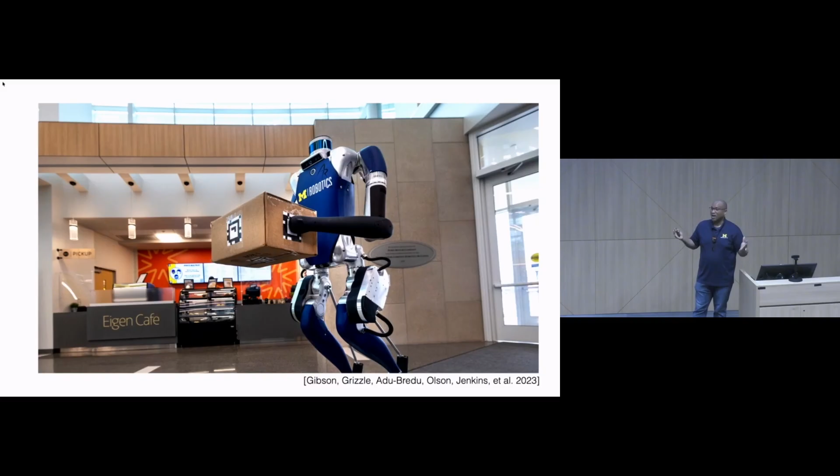Just to give a sense of one of the robots we've worked with, this is the Agility Robotics Digit. This is a robot that my colleague Jesse Grizzle had in the lab, and I've had the good fortune to work with him. One of my students and some of his students worked together on getting this robot to do various tasks at the building scale - being able to pick up objects and take them to places beyond just the lab, working in common human environments. This really poses new, interesting, and challenging problems for us.

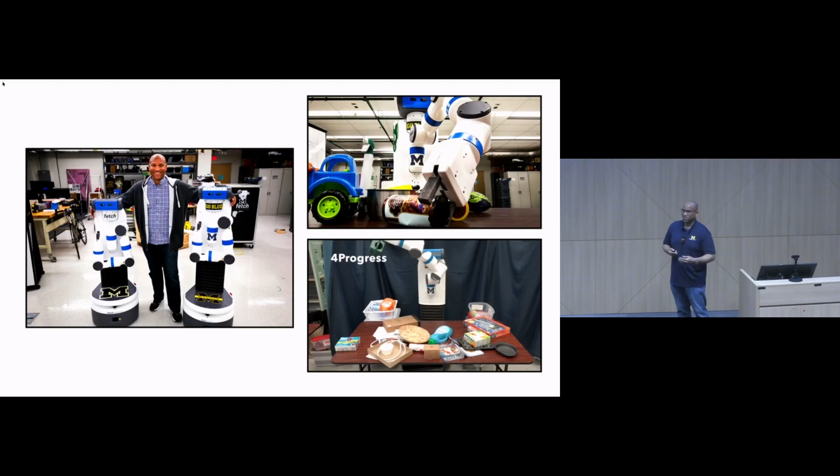I've had the good fortune of also working with a number of mobile manipulation platforms. Our still go-to is the Fetch robot right here, capable of mobility and manipulation. We've had this robot since 2015 when I started at Michigan, so somehow we've been able to keep this robot alive and working over 10 years. The ability to have dexterity in complex cluttered scenes like our human environments is one of the major challenges we're starting to address in robotics.

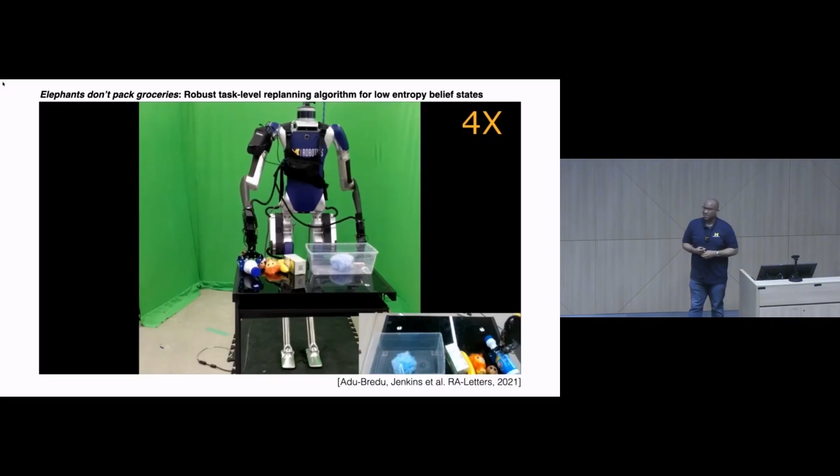So to give a sense of what this looks like for humanoids, this is work that Alphonsus Adu-Bredu, who's now at Boston Dynamics, did with humanoids. This was just a bin packing task—the robot picking up different objects, sort of like a grocery store helper that could pick things up and stack them in a little knapsack. This would start to add manipulation and dexterity to our robotic platform.

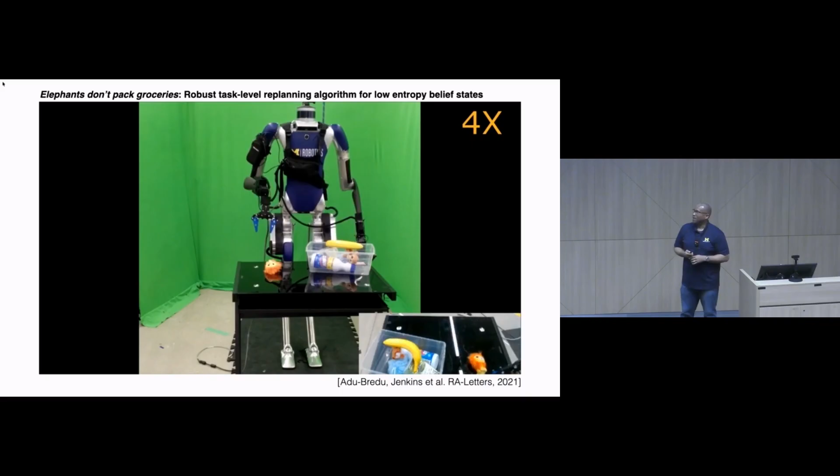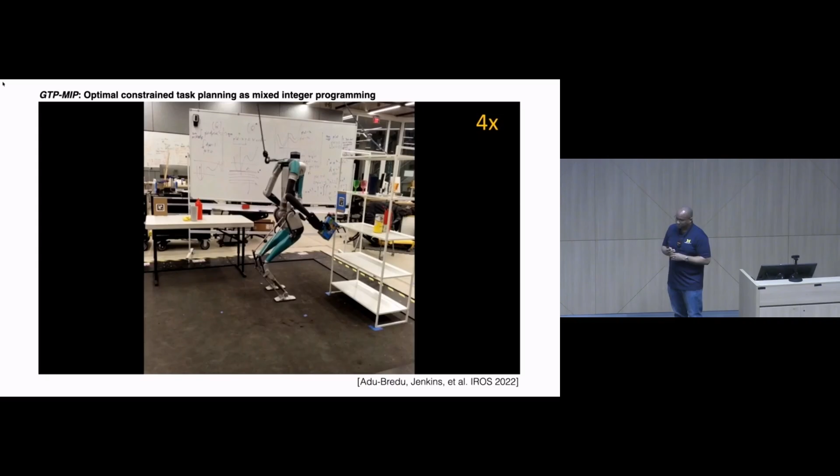And this is what we did—it says 2021, but really 2020, this is the beginnings of putting manipulation with robotics. We tried to extend that to a shelf stocking task. You can see there are AR tags there. This was really about how we could use it, and at the time Alphonsus was interested in mixed integer optimization, which gives you a sense of where we were at the time.

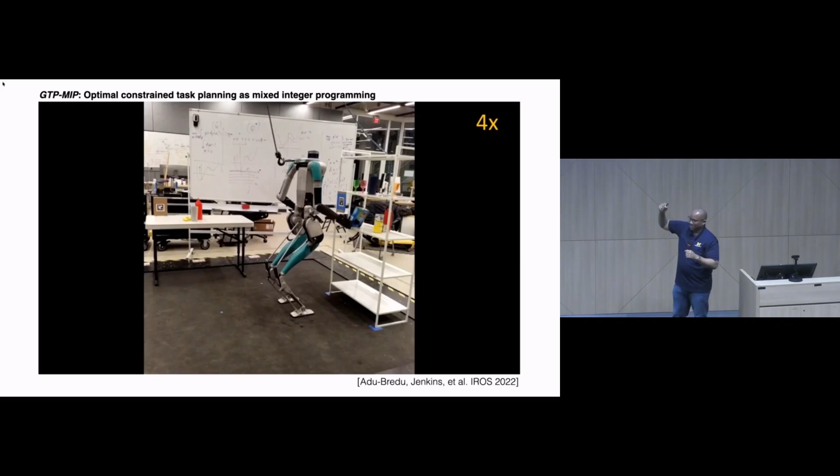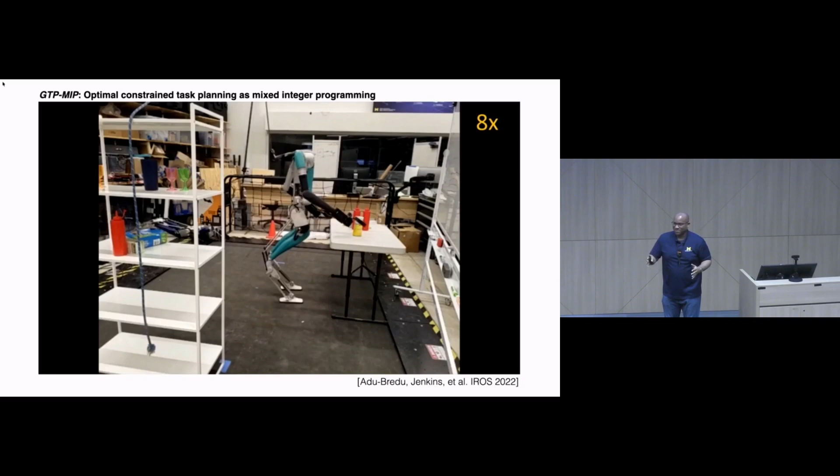We didn't really have perception fully integrated, so we had AR tags and QR tags everywhere. The robot kind of doesn't have full perception of the shelf, so it makes a few mistakes here or there. It can work—we can combine mobility and manipulation. We should also note the robot has to move, then it stops, then it manipulates, does the manipulation action, then moves again. So it's not necessarily fluid, but that gives you a sense of where we are in humanoid robots.

We're starting to get past that state, but it still is true. We could also do material handling tasks.

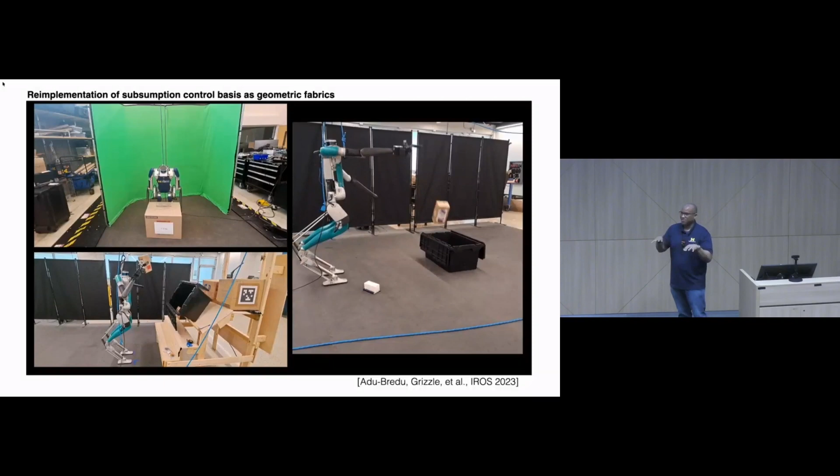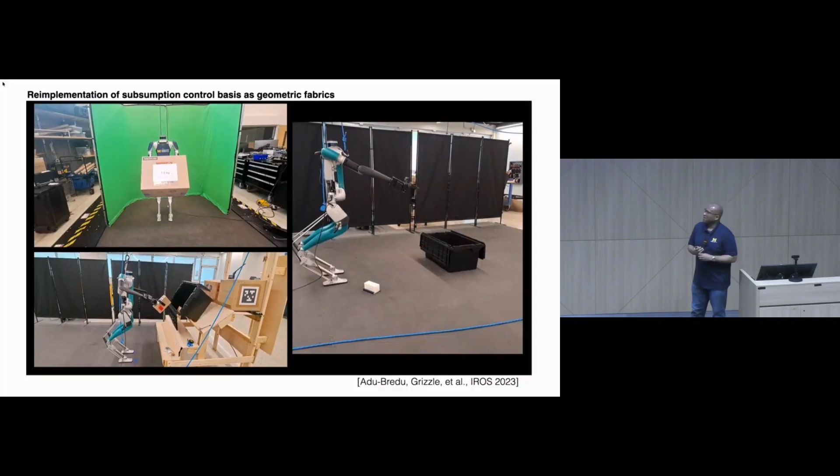This was something that Alphonsus worked on with Jesse Grizzle, which was to be able to use geometric fabrics, which is sort of like a robust control basis, to do various tasks in a reactive kind of way. This is sort of like null space compositions of controllers, which is an interesting idea. I'm still not convinced because I like some form of guarantee, some sort of robustness, but I think these are interesting ideas. It shows where we were at that time.

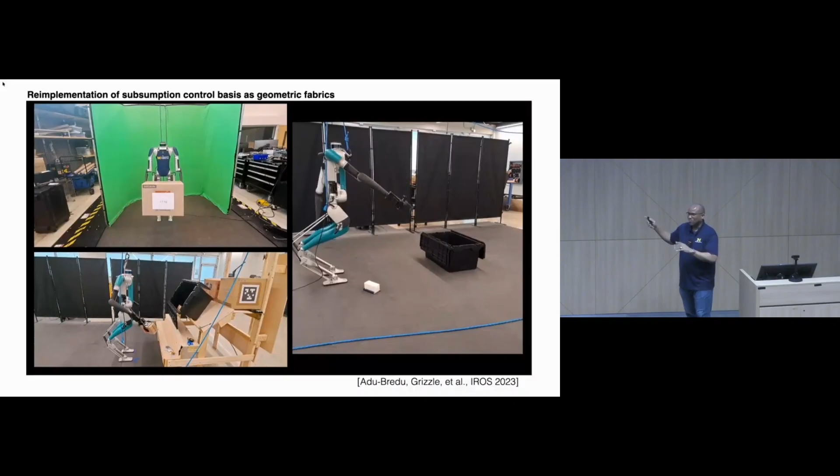What I would argue, though, is in order to take the next step, to get beyond where we are right now, we have to think about a degree program that can produce lots of people that can think about the emerging needs for robotics as a discipline of itself, not just an interdisciplinary research area, that thinks about both equity and excellence, so we can have a positive impact as we make our intellectual advances and meet these emerging needs in society.

There's interest in robotics and what we're doing, and we need that help. If you want to know more about what we did to launch the robotics program, we published on arXiv, so all the details of what we had to do in designing the program and what we had to do to get approvals, you can see that on arXiv.

As we did this, it really led to sort of 3 big questions that I got as I was leading our robotics major. Does anybody want to know what the top question I get from students for major? Because it's 9am I'm not going to ask you to say, but the top question is, what job can I get with a robotics major? Like why should I not do computer science or electrical engineering or something that people understand and employers want? Why should I take a chance on robotics, which people don't really know about?

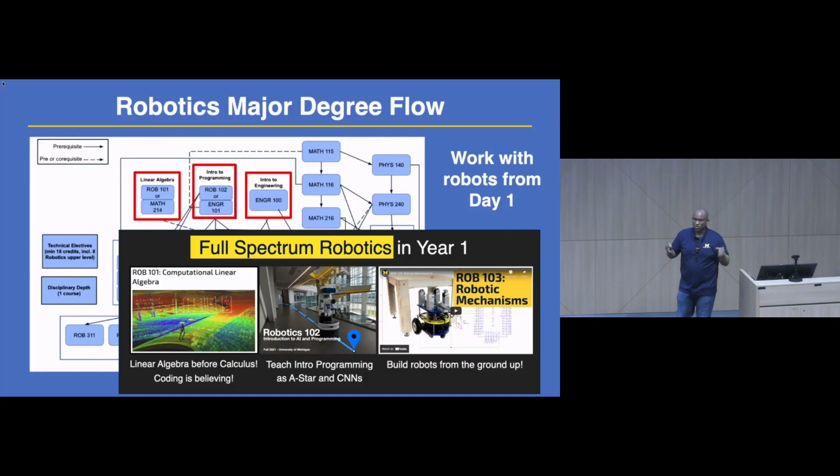What that really means is that we start with linear algebra alongside or maybe even before calculus and use it for sensing and control tasks. We teach programming through teaching autonomous navigation, so A star with a little bit of a convolutional neural network, and we have a robot building class. So students work with robots from day one.

Then we get to year 2. We put human-robot interaction and professionalism and professional ethics up front. So this is the class that we take in their second year, an intro to human-robot systems class. So working with people to develop robots for people is really important. We don't want to push that off to the end.

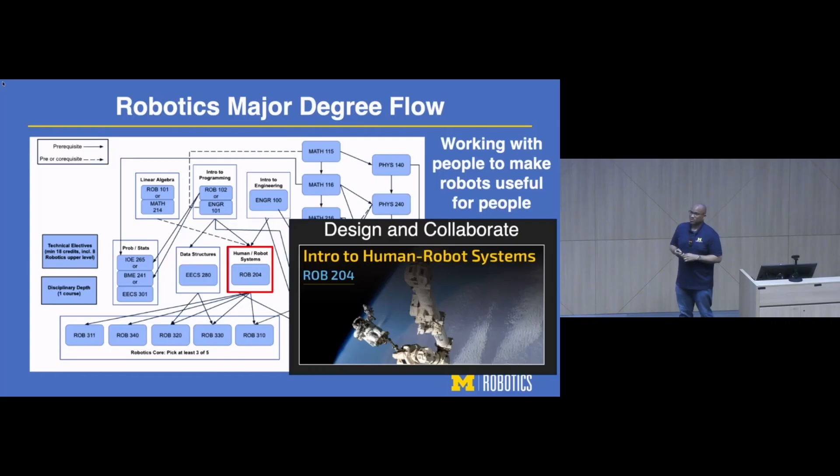Every major needs computing. They need to take first semester data structures, probability, electronics, mechanics. We can't avoid that - those are things that every engineer, every scientist working in this area needs. And then this gets to the core.

In our core, we try to have a set of classes where they have to really deal with sensing, reasoning, and acting and interaction on the whole. And so we have a number of these classes. I teach the Robot Operating Systems class, which is not just a ROS class - it's about inter-process communication and how you develop software systems for robots. So these are our core 300 level classes.

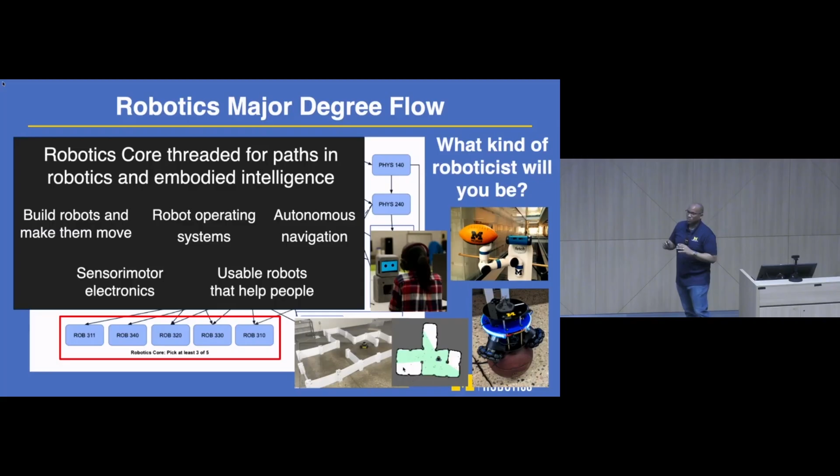But to understand where this comes from, we took the idea of Brooksian embodied intelligence. So Rod Brooks came up with the idea of a sense, model, plan, act framework. This is from his seminal paper, Intelligence Without Reason, from 1991.

And you're really thinking about the closed loop for how robots actually work and how we describe them. This is sort of Brooksian embodied intelligence. If we took that idea and put it into an actual framework, it looks like this: we have a closed loop between decision making and your actual system, with perception in between, and people interacting with both the system and the decision making.

This is just one way of thinking about it. If we take that loop and think about everything happening inside of it, our system is there. We sense the world. From our sensing, we develop partial observations. We develop a model of the world from those partial observations, and use that to make decisions. Decisions then go into controls to generate the forces that go into your system, and then we do it all over again. This is really how almost all of our robot systems work.

If we take those and put the math that goes along with that, and also say certain of these deal with interaction, with autonomous robotics, and embodiment or mechatronics, this really starts to give us a scaffold of what students need to be a roboticist, what our discipline looks like from a programmatic perspective. If we assign class numbers to each of these, they become our 300 level courses, and from those we have prerequisites.

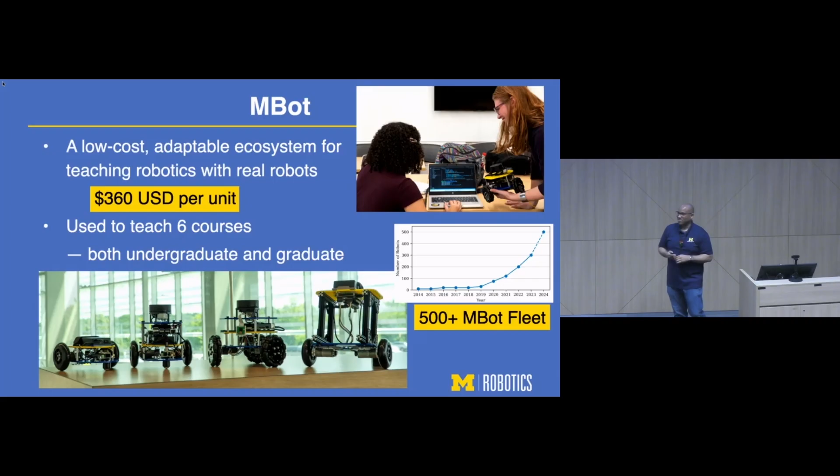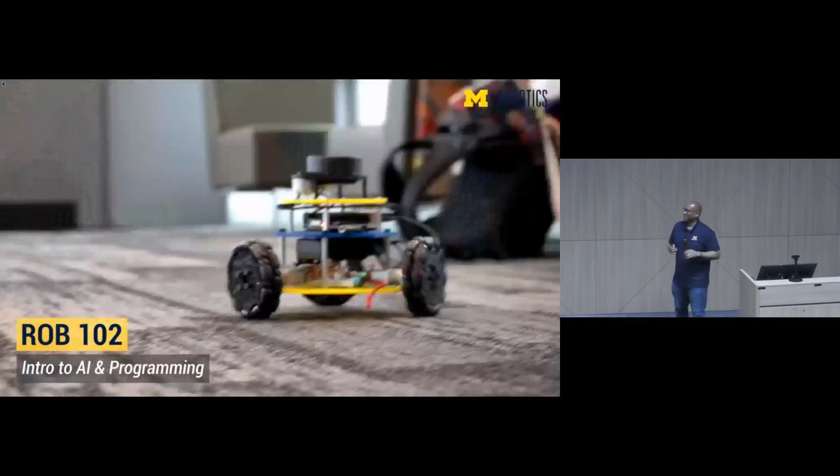This is the OmniDrive version of the robot that I use in my class. It has laser range finding on it and can move around - giving a lot of thanks to Peter, who's there. Peter doesn't know how much he and Manuela influenced me when thinking about the OmniDrive design. We have a really low-cost platform that does full SLAM, so our students, as sophomores and juniors, do full occupancy grid SLAM as a bridge into larger explorations into perception.

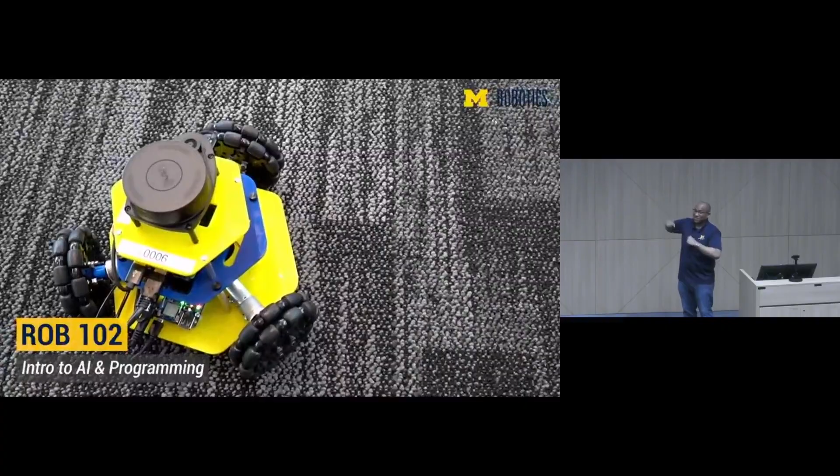This is actually a first semester class, where we teach programming through the lens of AI through autonomous navigation. So we have to build and maintain about 500 of those robots - just a small aside there.

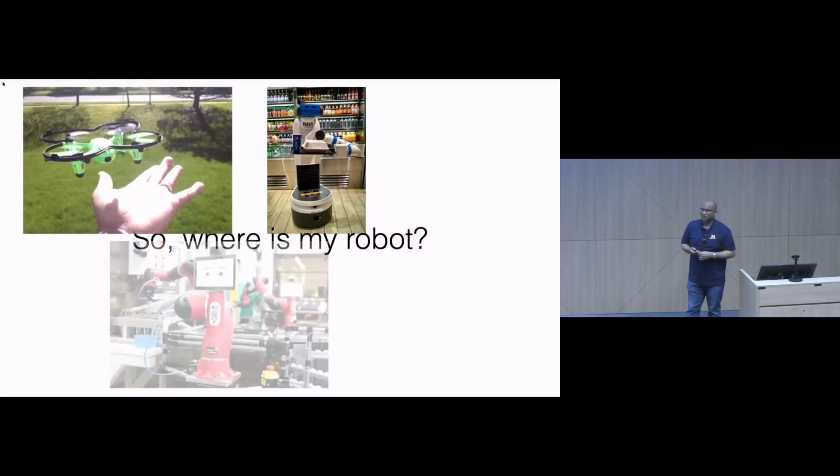So that's really our program. But then we get to the next question that students ask me, which is: so where's my robot? A lot of students ask, where can I go to work with these robots? And I would tell you that your robot is already here. We have different types of robots doing all different types of things, and you can buy these robots right now. But the real question is not necessarily how many robots you have, but what are they doing?

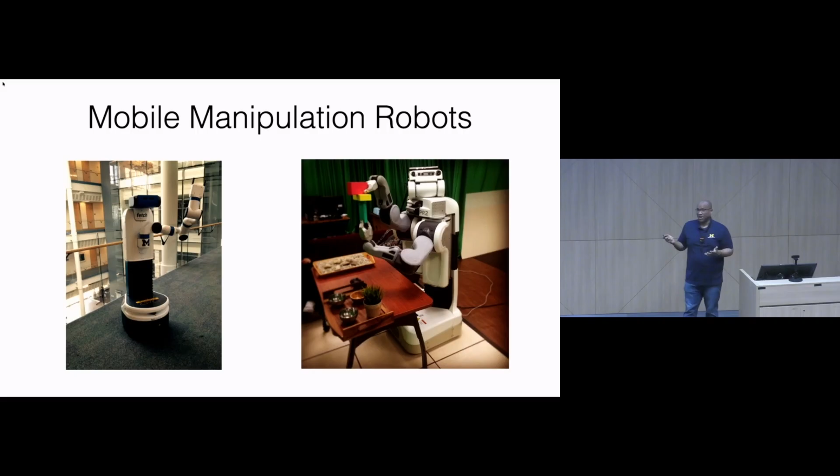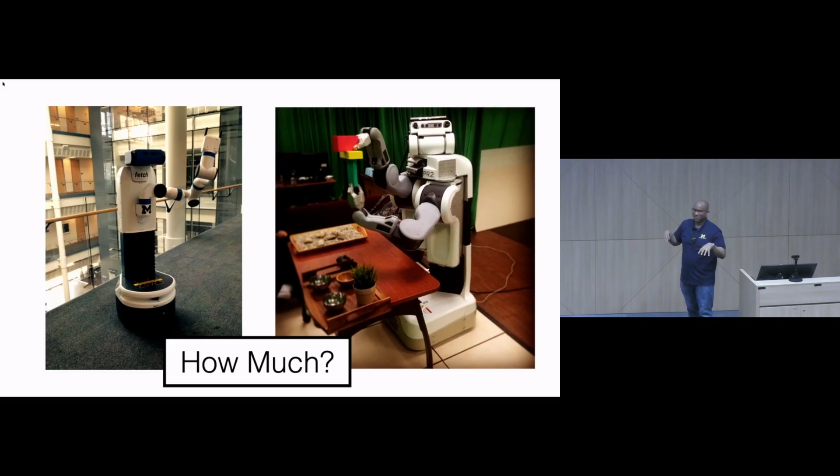Mobile manipulation, being able to work, move, and have dexterity at the human scale is really important. You can buy these robots right now. So usually I ask - because I'm running short on time, I won't ask how much these robots cost, unless somebody wants to guess. That's the Willow Garage PR2 that I had when I was at Brown, the Fetch mobile manipulator when I made my first purchase here. Anybody know how much these cost? Anybody want to guess?

What's that? USD, yeah. What? 500K, I like that, there we go. 500 - what was your guess again?

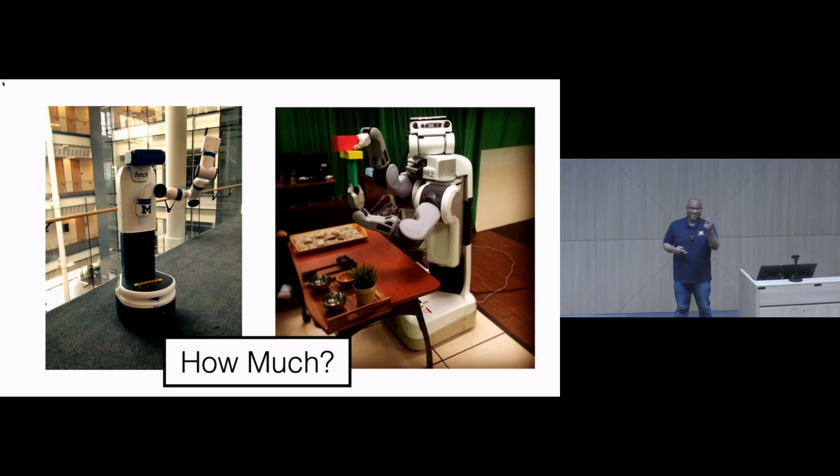20K, all right. I like that. I like all of those answers. The reality is all of those are right, because it just depends on what time you're thinking about.

So I bought my Willow Garage PR2 for $400,000 in 2009. First purchase when I got to Michigan was the Fetch robot, about $100,000. If you've seen my talk before, you'd know that the first humanoid robot I worked with was the NASA Robonaut, and if you did a least squares regression from linear algebra, you'd get $20,000 - that was my prediction back in 2015 of where robots were going.

And that roughly is true. On one end, you've got Hello Robot, the Stretch, which is about $20,000, a little less than that. Then you have humanoid robots, and all sorts of other systems on the high end - you're going to see all sorts of heterogeneous robots. But this is just the hardware. We've gone from building small numbers of bespoke robots all the way out to massive numbers where economies of scale lower the cost.

But when we start to think about the software of these robots, the autonomy - when I was a graduate student, it was all teleoperation, remote control. That was how most of these robots worked, with head-mounted display and VR and those types of things.

Over the last 20, 25 years, we've been able to do things like put that there. We have enough autonomy where we can have a robot go from location A to location B, like an autonomous vehicle or a mobile manipulator.

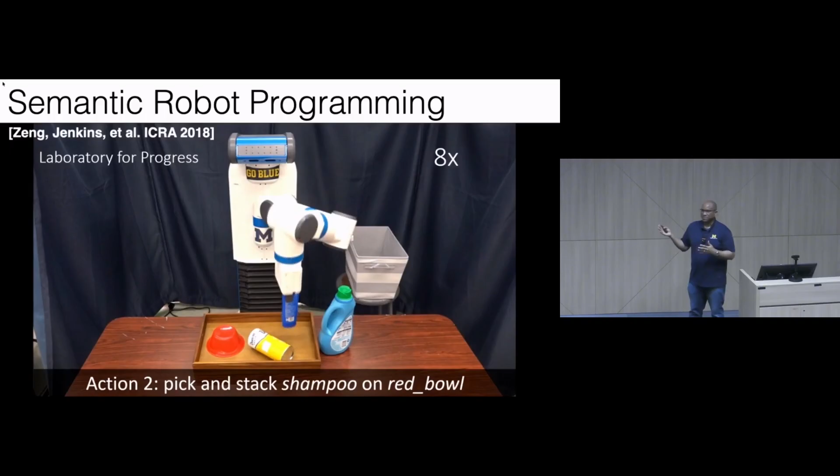And then be able to - that's how the robot would work. You could just give it that without giving a language prompt - that's how you express a high-level task. So what's important in this, like I said about 10 years ago, is that you're not telling the robot to do this action or this particular motion in its configuration space.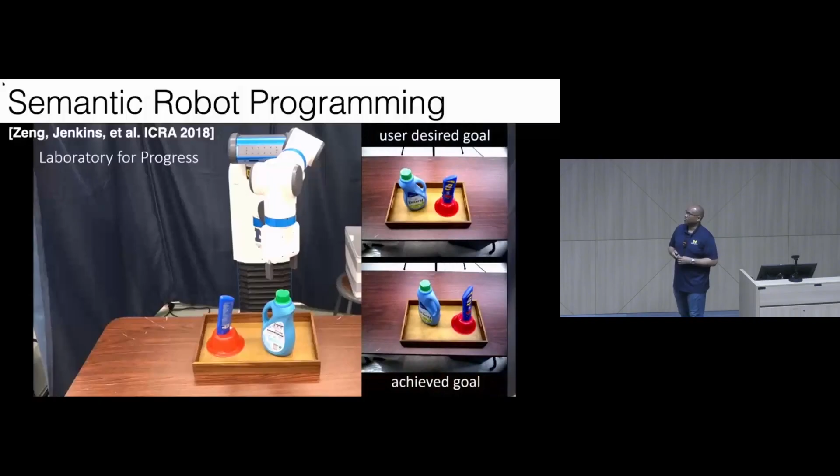So we did semantic robot programming with a number of robots, and our robot is able to work in a number of different scenes with some constraints, but we're able to have that goal-driven robot.

One thing I sort of hid with this is the challenges we have with perception, and so scene estimation and clutter can be a really big issue. And so for all sorts of reasons, such as occlusion, stacking, off-balance constraints, everything that my kids do to mess up our house, this is what we have here.

In general, what we want to do for perception is not rely on green screens or monocolored objects or isolated objects. Usually when we're showing videos of some great manipulation task, we've isolated the world into particular objects, and the clutter that exists in our usual world is not there, or we use AR tags. We'd like to try to ease those crutches.

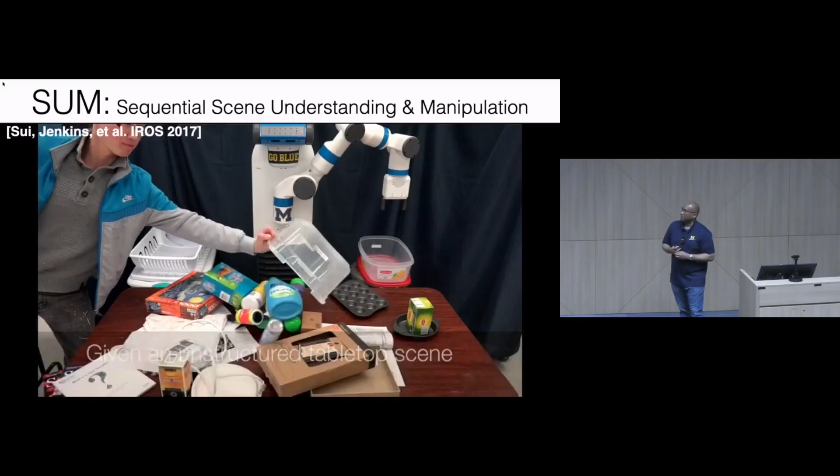Another thing that my group and I worked on was what we call sequential scene understanding and manipulation. This was trying to combine neural networks for recognition with probabilistic inference, so we can get the best of both worlds, the robustness of probabilistic inference and the speed and recall power of neural networks.

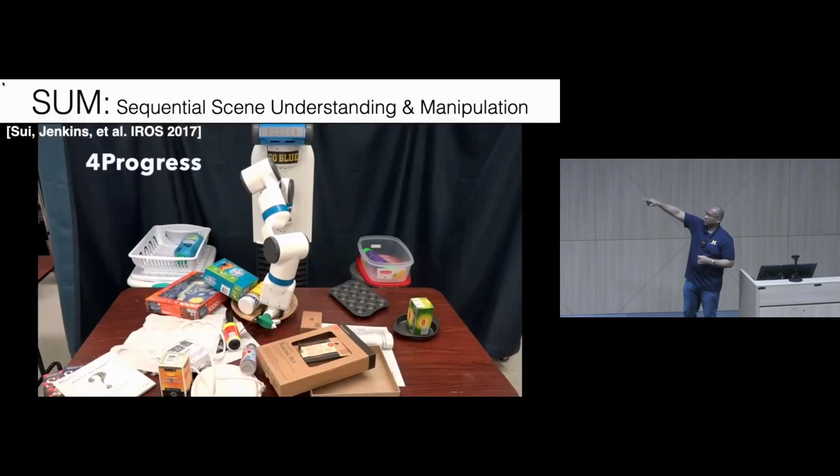In this case, the robot is able to detect objects in clutter and sort them into objects that should go in the laundry room and objects that should go elsewhere in the house.

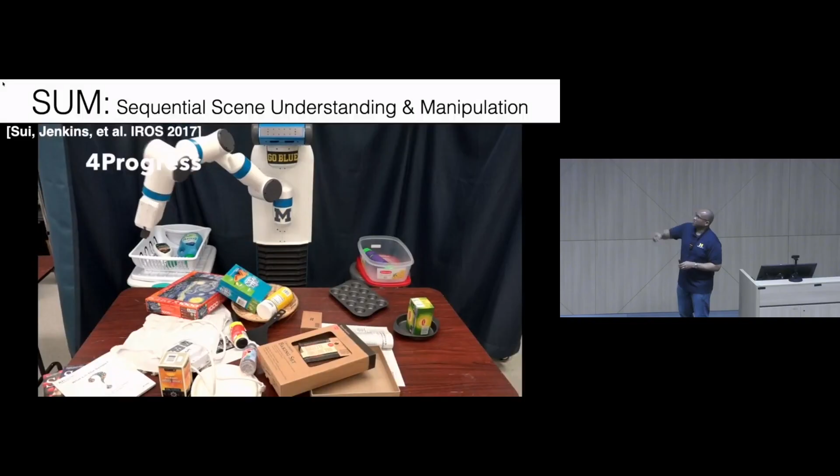If you're American and you saw that the comet went into the bin that should go into the laundry room, that's not right, it should go into the kitchen. But that's not because the robot made a mistake, it's because my students don't do laundry or dishes, and so they made that mistake.

Anyway, the way this worked at the time was that we would use a neural network. We use RCNN to essentially generate candidates of potential objects that were in the scene, and then from that we would enumerate the different possibilities of what object could be there.

We would try to refine that into a physical state estimate, a reasonable state estimate, using essentially particle filters on each object. That would give us a reasonable state estimate of the world that we could then use to do grasp planning, using the fabulous Rob Platt handle grasp estimator.

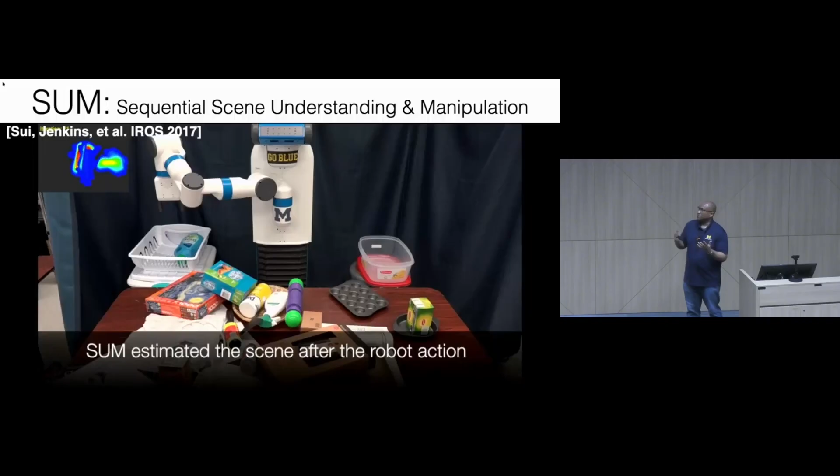This system worked pretty well for doing manipulation in clutter, and we still use this manipulation pipeline in the lab today.

But as we come back and talk about, we want to do more than just grasping. We want to know the affordances on the object. We come back to our lightsaber right here.

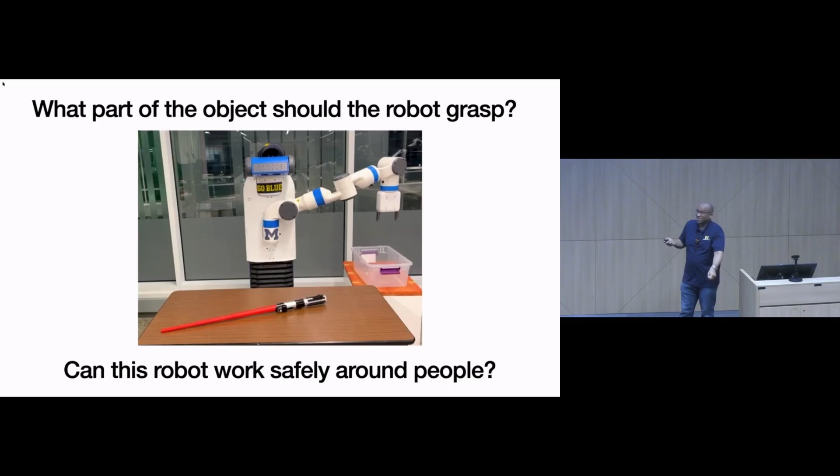So what part does the robot approach, right? That is obvious to us, but where should it grasp? For us, it's pretty easy to know it should grasp the handle. The robot should just be able to know that it shouldn't just grasp on the red part, it should grasp on the handle, because that is a lightsaber.

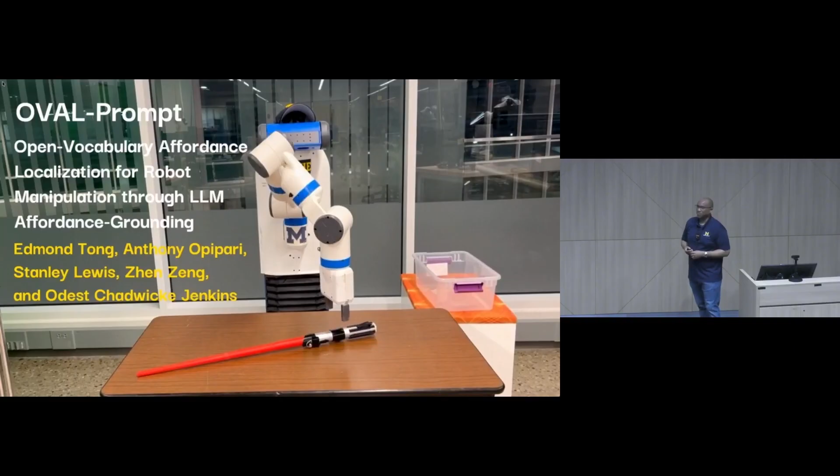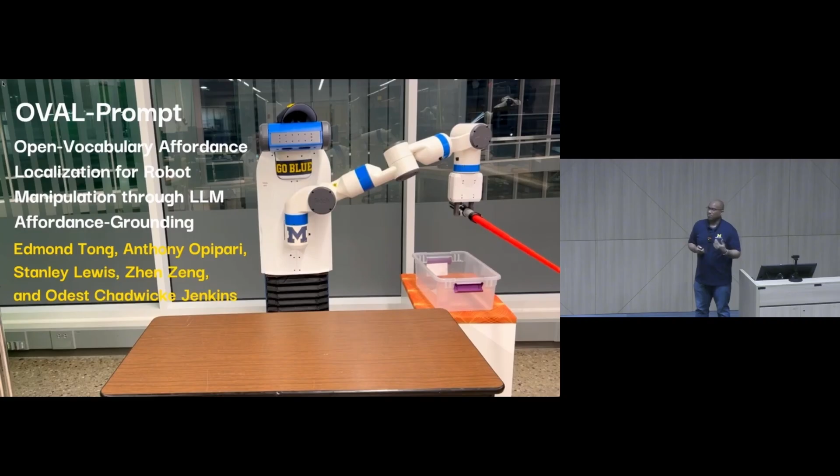But estimating the semantics can be challenging. One thing that was led by Anthony Opipari and a number of students, Edmond Tong and Audi Balaji and a number of other contributors, was our oval grasp pipeline. The idea is to think about task-oriented grasping.

For instance, if your robot is going to grasp scissors and give them to you, should the robot grasp the scissors by the handle and then lead with the sharp part to give to you? That'd seem pretty aggressive, because it might feel like it's stabbing you, and that's not great. What you should do, like with a person, is grab by the sharp end of the scissors and hand over the handle to the other person. That really is based on the semantics that we have for these types of objects.

So what we've done is we've created oval grasp, which essentially will take a language prompt as the input, and then be able to use the combination of an LLM and a VLM with point cloud data, trained so that we can actually filter grasps based on the semantics of various objects. The details are in our paper, which appeared at ICRA this year and is also available on arXiv.

Essentially what we did was have different types of objects, and based on the task, based on the language prompt we would give, the robot would have to figure out where to grasp so it could achieve a particular task.

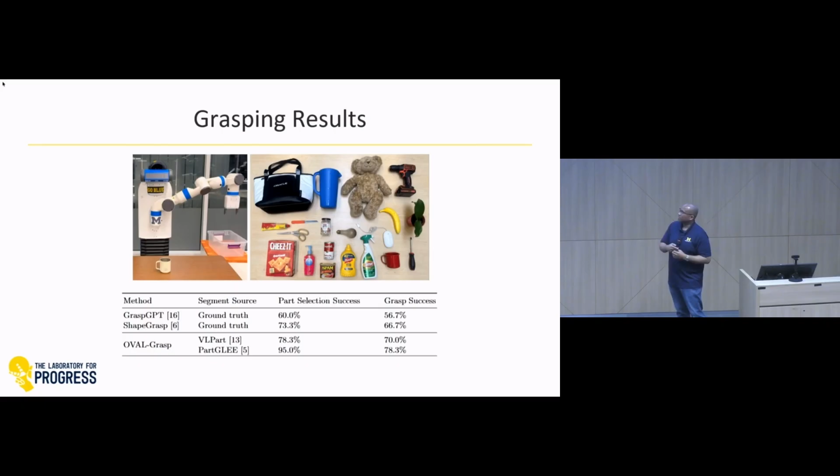When we do comparisons to other approaches like Grasp GPT and ShapeGrasp, we get better results with our combination of LLMs and VLMs. Those are just our numbers right there.

But qualitatively, there's a number of things we could do with this. If you have a box and you said read the barcode, the robot would be able to grasp so that it could actually look at the barcode and it's not occluded. Or if you want it to read a label, it could make sure its grasp isn't occluding that.

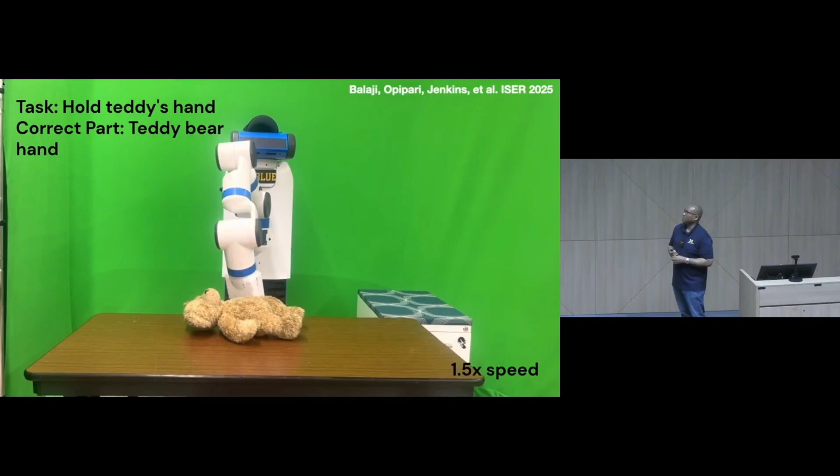So this is just some results that we have right now. If you ask the robot to peel the banana, it knows it has to grab the tip of the banana so it can peel all the way down and hand that over to a person. If you said hold the teddy bear's hand, that's a language command, and the robot could grasp the hand of the teddy bear and move it over. So we have what you'll see in a number of these.

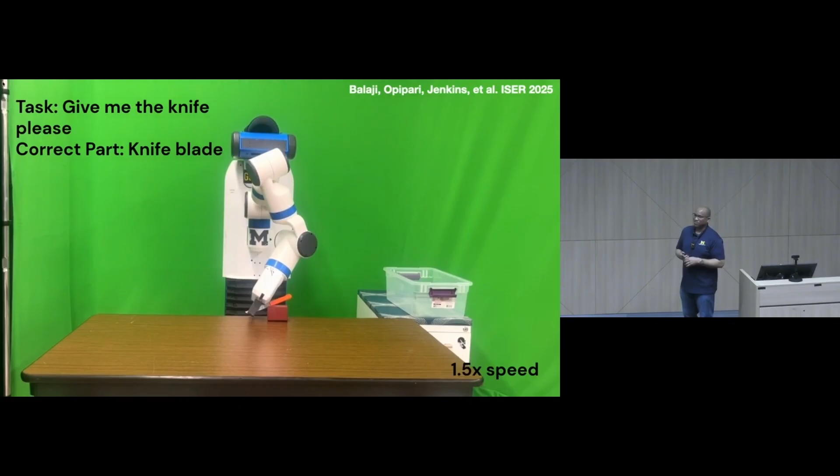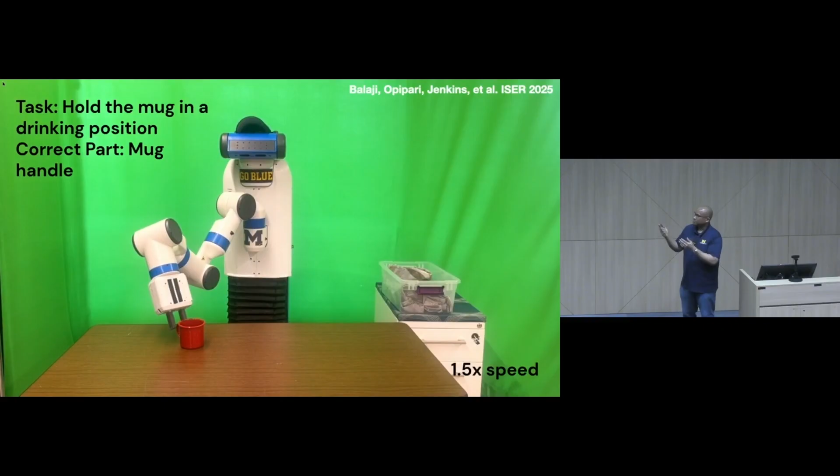This is like the knife - if you're going to give the knife over to somebody, you should handle it by the blade and leave the handle apparent. This is another example with the mug, holding it by the handle. So you can do this directly with language prompts, which is pretty good.

The other technical part I wanted to talk about is segmentation for 3D maps. As I showed before, being able to do dexterity with humanoids at the building scale means we can start to build the geometry of these spaces, but we still need to know the form and function of objects so we can have affordances like the OVAL-Grasp project. We've got to segment out and know that object is a particular object, so segmentation becomes really important for our 3D maps.

One thing we've been working on - Anthony Opipari has been working on this with a number of good colleagues at Amazon - is doing class agnostic video segmentation. If you use segment anything models, segmentation is getting really good, but it's not necessarily perfect.

So what we want to do is think about how we can develop the best segmentation of Gaussian splats, where we can take a sequence of image frames and get consistent, non-jittering segmentations throughout time and space, so we know that thing is that thing and it stays that thing in the mind of the robot for a long time.

So what we had - do I have to click through this? Hopefully I didn't. Oh, I went too far.

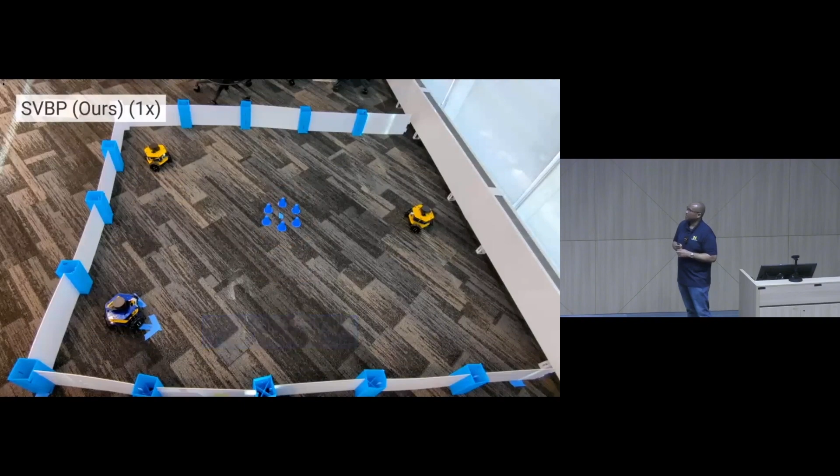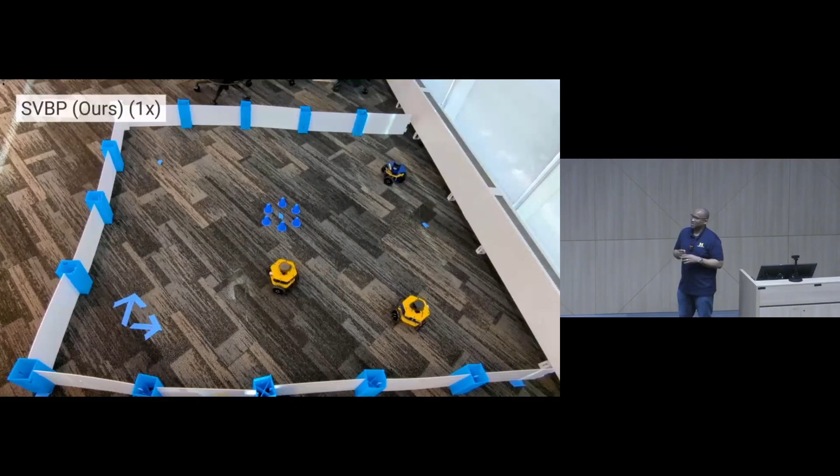And so they can move around very, very fluidly to get to their goals. I love the fact that we can run this on relatively cheap hardware. For the sake of time, I'll just assume that robot gets to the right spot.

The last thing I'll talk about is just MPC is great, but we can do even better. This is where Stein actually can be useful for us. If you're doing MPC and using a proposal distribution to generate your rollouts, you assume that's a unimodal distribution, but sometimes it could be multimodal. Stein inference helps us characterize that distribution a little bit better, so we can get improved performance on certain control tasks.

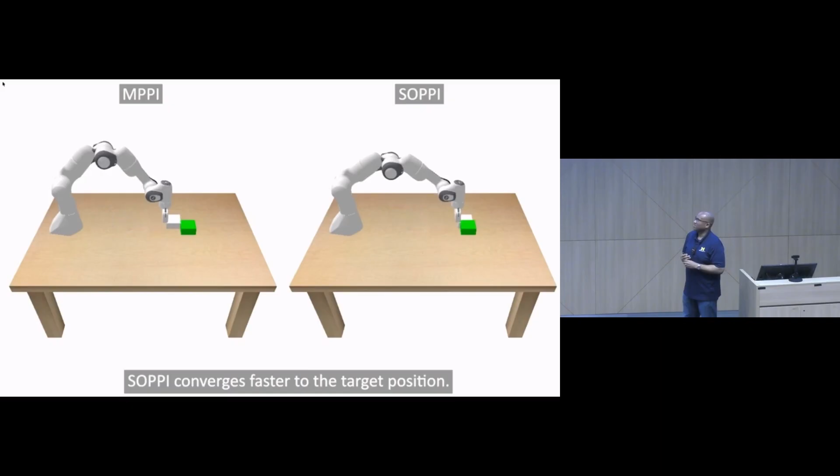For instance, if we take our cart pole, it can get to a desired set point a lot faster than just using a baseline MPPI, which is model predictive path integral control, a sort of non-parametric version of MPC. We've shown it can work pretty well for arm control, and for walking tasks where you might have different types of uncertainty with the gait pattern, in the OpenAI Gym area. We're able to get more stable control just by doing Stein.